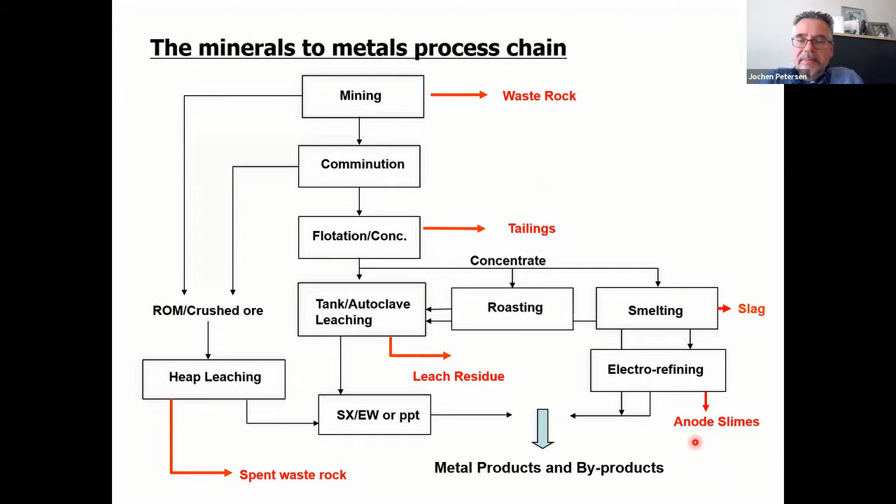And smelting, as I said earlier, separates between a metal and a non-valuable phase, and that phase is referred to as slag, which is then disposed of as a metallurgical waste. And finally, in electrorefining, in the context of copper, you also have a waste referred to as anode slimes, and they are of particular interest because they are one waste stream that has historically already been recovered, because it contains a lot of valuable metals as a byproduct of the value chain.

So, as I now illustrated in this previous slide, the mineral beneficiation chain generates solid waste streams at every step. But historically, the focus has only been on recovering the major value metal phases in the process, often just a single metal or sometimes two value metals, and all the minor components that are associated with that mineral phase end

up in waste streams. And furthermore, and this is also important to stress, even the target metal is never extracted 100%. Quite far from it, because you have so many steps on the way from the mine to the final metal product. Each of the process steps incurs losses, and those losses then reflect in the waste that you are producing in that particular process step. So that target metal is effectively not recovered, but ends up in the waste material through process inefficiencies.

In more recent times, and I should say this is already stretching back some 20, 30 years now, technological development has been and continues to be made to recover minor metals, especially the so-called tech metals that are attractive in high-tech applications, directly during the processing while they're still easily accessible in process solutions, in hydrometallurgy in particular. And so you have a whole host of process retrofits that the major refiners have introduced precisely for the purpose of recovering the metals while they're still easily accessible in the process stream.

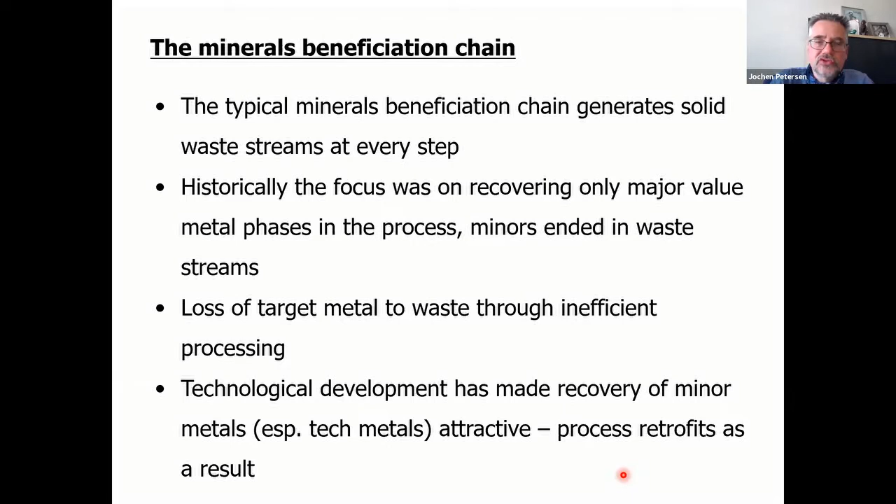I mentioned that all the key minerals have certain metal associations. So there is no such thing as a pure mineral of one type or another. And because Aysha didn't know how to pronounce it, the word chalcopyrite is the classic copper mineral, but it does not occur in pure form. It is associated with a whole host of other metals that need to be taken into account when you consider the recovery processes.

So for example, this is often quite well represented through the so-called wheel of metals, an example of which I'll show you here on the slide, where you start off with the key metal or the carrier metal that is of interest in a particular phase, for example copper, and then a whole host of other elements that are associated with copper minerals processing, but only some of which are easily recovered, and that's the gray inner circle, and many of which just disappear because they are too insignificant into waste streams or process byproducts, and some of which are just not economic to recover at all.

And so these wheel of metal analyses have actually been done for many materials in order to identify the opportunities for recovery of metals, either during processing or by reprocessing the wastes.

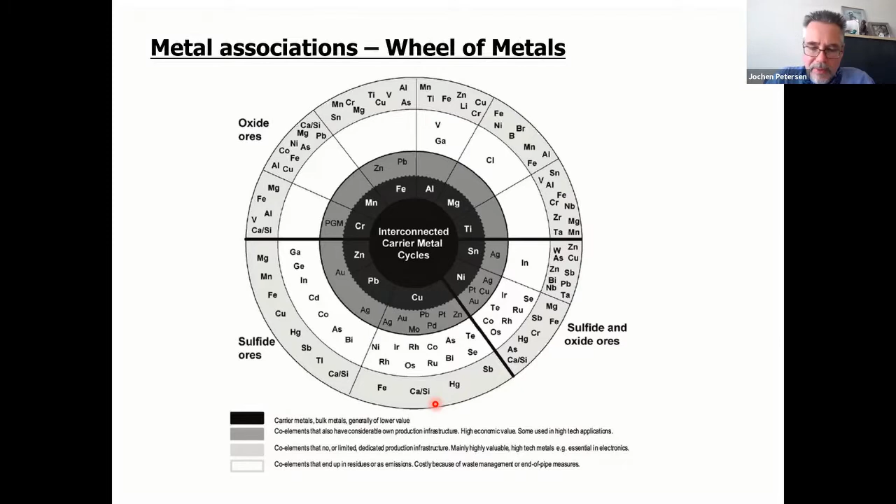Now, talking about wastes, I said earlier that historically these are just disposed of. So value metals are lost due to waste, due to uneconomic grade, to inefficient processing, to the lack of a commercial incentive for recovery at the time, and I'll come back with some examples in a short while, and the lack of a suitable technology to extract the value metal. And so these wastes are never just purely valueless. They may contain value fractions that have just not been recovered at the stage when they are disposed of.

And so forms of disposal I show here in the slide, depending on the nature of the material. I show here a waste rock deposit. So that's relatively coarse boulders that are piled on a big pile on the surface. You have various stockpiles that are built up in the operation. You may sometimes also just use the rock material as actual landfill. So for example, filling in whole valleys and then covering the top of the material.

And then the classic one, the most important and most fraught one in many ways, are tailings dams. So this is just a nice aerial picture of the disposal, where you basically take the fine material that comes out of concentration processes and leach residues as a slurry, you let the slurry settle out, and the water is then decanted either by sucking it away or just seeping through the deposit as a whole, and you just build up layers and layers of this deposited material.

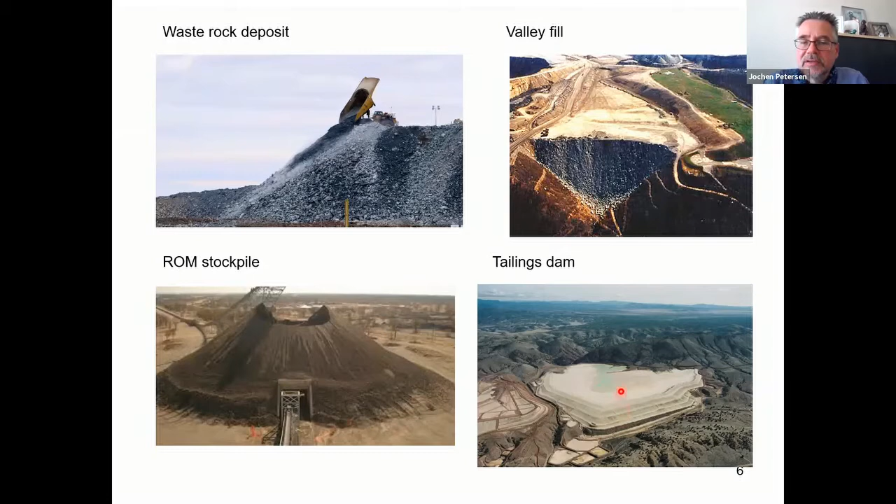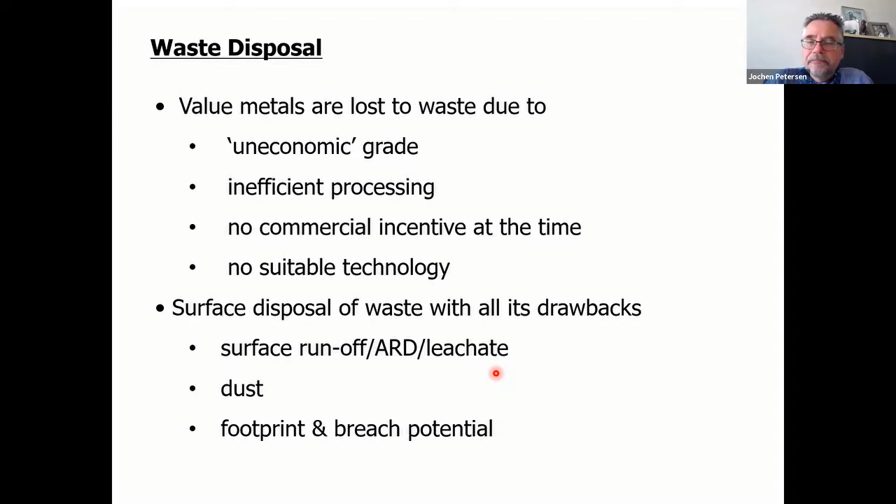But what is important about surface disposal is that very little of that material is backfilled, and most of the material is disposed in surface deposits with all their drawbacks. And I'm not going to go into much detail because they're all well known. We had various presentations in this forum on the characterization and issues associated with the surface disposal of waste, such as surface runoff, acid rock drainage, leachate generation, dust, the physical footprint and the potential for breach. So I'll just show here a few pictures to illustrate these effects.

Catastrophic dam failure, where you basically have a breach of the dam and a lot of slurry just runs out into the countryside, often burying under it human settlements or agricultural land. And so we hear these stories on a regular basis. That's one of the main issues associated with waste disposal, but that is only the most obvious one.

Mine dust. This is a historic picture, but nonetheless it still occurs, particularly around tailings dams in Johannesburg: these classic dust clouds that arise and affect human settlements around where the dust comes from through respiratory and health issues. And again, we have already heard about this from our colleagues who work in the mine dust network.

Then leachate generation. This is the process when incipient water, rainwater, seeps through the deposit and chemically interacts with the mineral contained therein, eventually reaching the groundwater, or surface runoff that will channel itself and find its way into waterways, so that you get the classic yellow boy discoloration of natural riverways from your classic blue to this yellow-brown color.

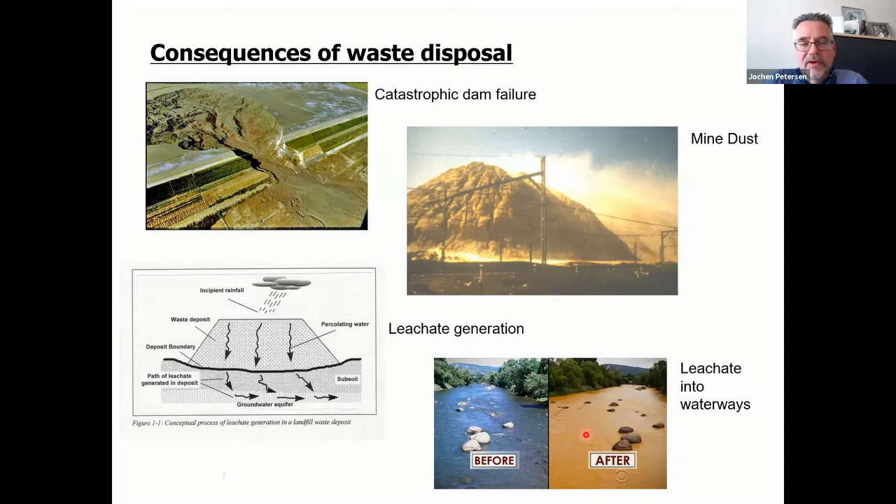And that is very much a real problem here in South Africa. There is a lot of research underway, not just to understand it, but also how one can mitigate these effects. But the focus in this conversation is really just about reprocessing from waste. And I said earlier already that some of this is already being done for different incentives, and I give a number of examples here.

For example, the recovery from historic tailings, because you now have better technology to more efficiently extract the material. For example, the Ergo process in Johannesburg on the East Rand, where basically all the tailings deposits are reclaimed, and both gold and uranium are extracted by better liberation techniques and better leaching conditions than you had in the original process 100 years ago.

There's also recovery from historic mine tailings due to a shift in economic value. A classic example here is cobalt, because now everyone is talking cobalt, everyone is after cobalt, but until 10 years ago cobalt was not a particularly important metal. There was enough supply as byproduct from conventional processing that people did not scramble for it. But with the whole battery storage and energy storage debate, cobalt has now become a hot commodity.

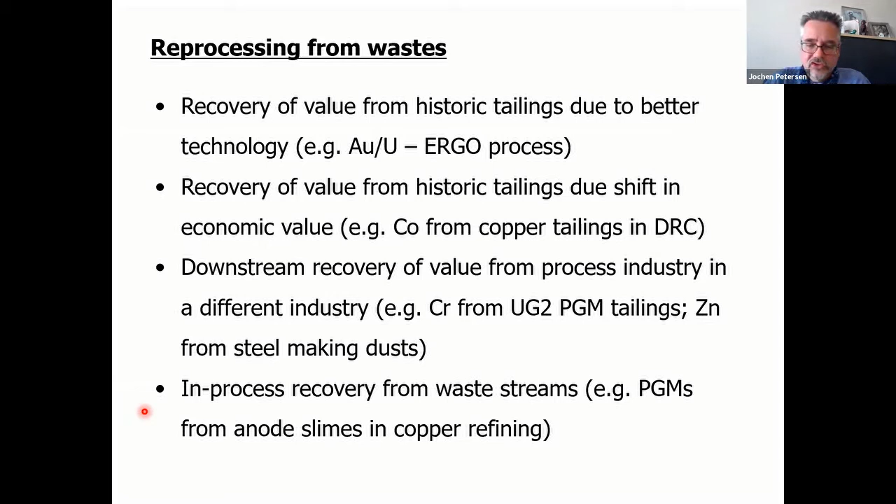There are many other opportunities; some are under consideration, some are being actively pursued, and this list is by no means exhaustive. As a first example here, the recovery of gallium from aluminium process waste, the so-called red mud. Gallium is an important modern technology metal. It is in very significant concentrations in aluminium ore, but it does not get recovered by the conventional aluminium process, the Bayer process, and can be extracted from the red mud phases.

Rare earths from phosphogypsum, as well as titanium sand residues. So those are two very different waste streams from two very different industries. For both of them, rare earth, there are hardly any deposits that have concentrations of rare earth on their own to just process them directly. And so in most cases, the majority of rare earth are associated with other minerals.

So phosphogypsum is generated from the sulfuric acid leaching of apatite. The apatite is a classic collector for rare earth metals that then do not report to the solution, but stay in the solid phase and are then precipitated by the gypsum that forms as a product of the phosphogypsum process. And they're very difficult to recover from that. Titanium sand residues: the beach sands that you process are enriched in order to extract ilmenite and zirconium phases, but the residue contains a significant portion of rare earths.

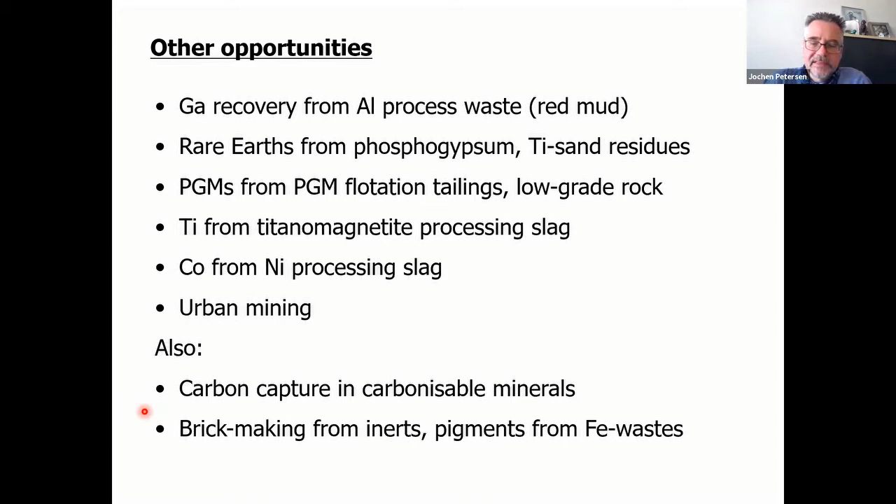So one needs to look at what incentivizes the reprocessing, and that is ultimately a look at the economics. Ultimately, it always boils down to the money. There are a couple of aspects in waste processing that are favorable, such as that the feed material is already mined, so you don't have to incur costs, or only very marginal cost, for extracting the rock or the minerals from the ground. It's easy to reclaim them from surface deposits. The feed material is often very finely ground. By processing them, you would remove an environmental hazard associated with leaving it in the surface deposit. And this way, by reprocessing it, you actually avoid disposal costs.

What is less favorable in the context of reprocessing is that the metal grades are generally quite low, and the more recently that waste has been generated, the better the original process technology will have been, and the lower the target metal grades will be. The target metals might also be contained in refractory minerals. Refractory means they are not easily dissolved or treated. You need high temperature processes or very aggressive chemicals to solubilize these minerals in order to extract the value that you want.

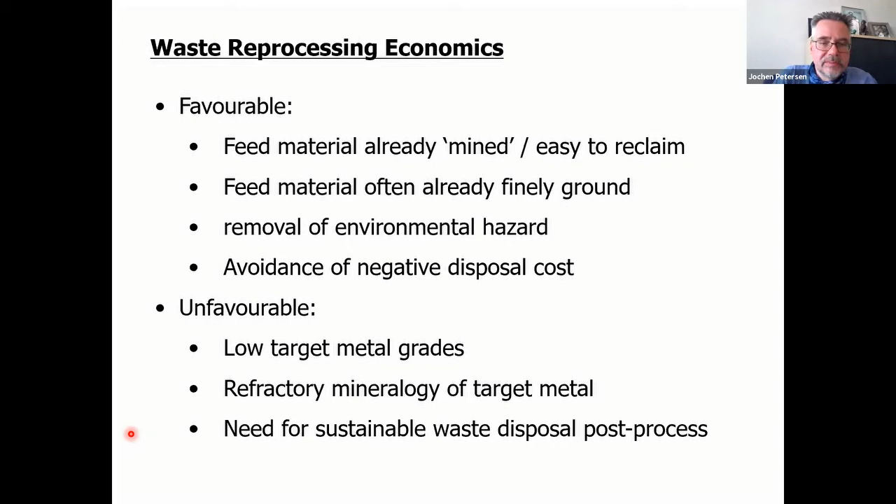So there are three economic drivers for the reprocessing of waste. The first, and I already alluded to that, is changing market demands. Cobalt for battery materials is the classic example, because it was almost considered valueless previously, and in the last 20 years or so demand has suddenly skyrocketed, because there are very few primary deposits of cobalt, actually none. Cobalt is always mined together with copper. So where it was previously separated away from the copper phase, it is now co-treated and co-extracted. But historically, there are significant amounts of tailings still available that contain extractable or economically attractive portions of cobalt.

The second driver is the political climate, or the concept of strategic resources. Here the classic example is the rare earth elements, which at the moment are mined, the figures vary, between 90 and 95% in China and refined there.

And there have been threats from China to basically exercise their monopoly and restrict the sale into the market of rare earth products. They are strategic for high-tech products and electronics, and particularly also for the manufacture of rare earth magnets that you use in windmills and for green energy generation.

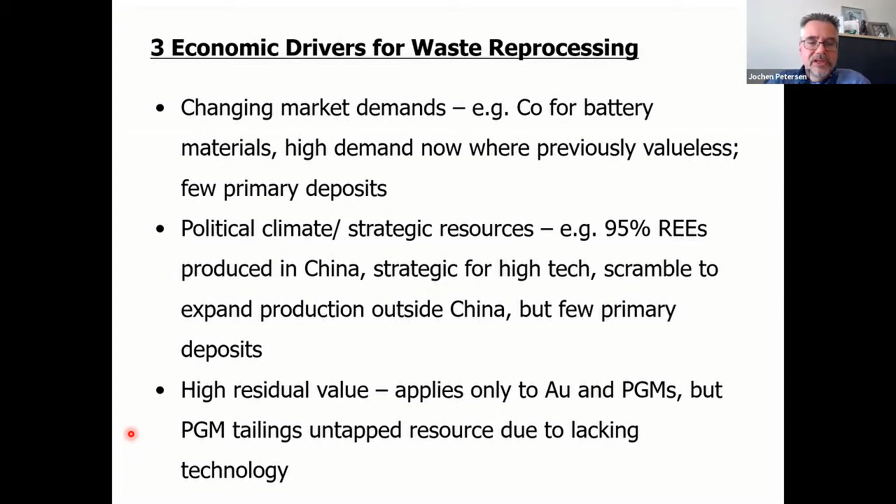So then let's move towards technologies that would be useful in the context of extracting waste. As I already indicated, economics are key drivers. So technologies ideally should be low cost in order to enable the processing of waste that one would otherwise just leave alone. To achieve that, one needs to look at a couple of characteristics that I've listed here. These processes need to be small scale and scalable.

So they need to operate, depending on the deposit size, from the ton a day scale to maybe the 100 ton a day scale. But a lot of the industrial extractive processes start at the hundreds of tons, or, depending on the raw material, at the thousands of tons a day or the tens of thousands of tons a day scale.

So one needs to be able to handle smaller streams, and yet the technology still needs to be cost efficient enough. It needs to be energy efficient. So energy intensive processing, particularly fine grinding or comminution processes and high temperature smelting, need to be avoided in order to make these reprocessing processes viable.

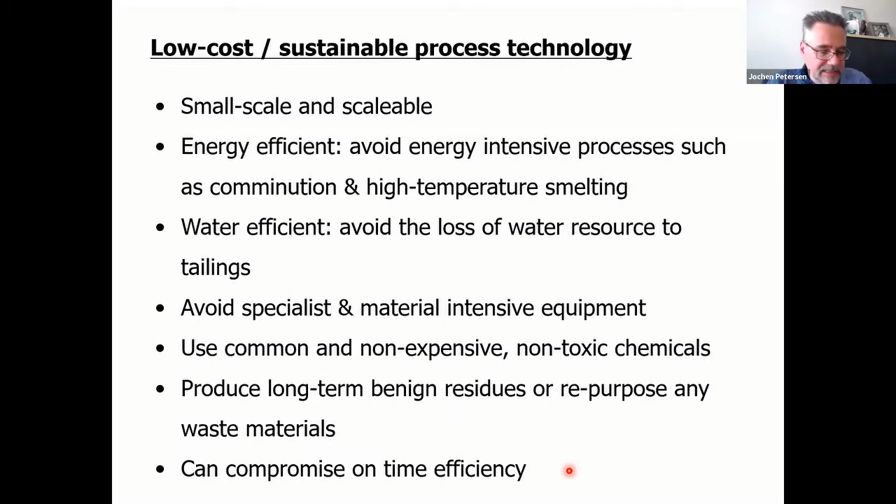So one such technology is heap leaching. And it is, as Aysha indicated, my area of expertise. It is a low-cost extractive technology, because, as I showed you in the first slide, it really just consists of piling the rocks on a big pile. You sprinkle solution on it. You put it on an impermeable layer at the bottom, and you extract the metal from the solution that runs through.

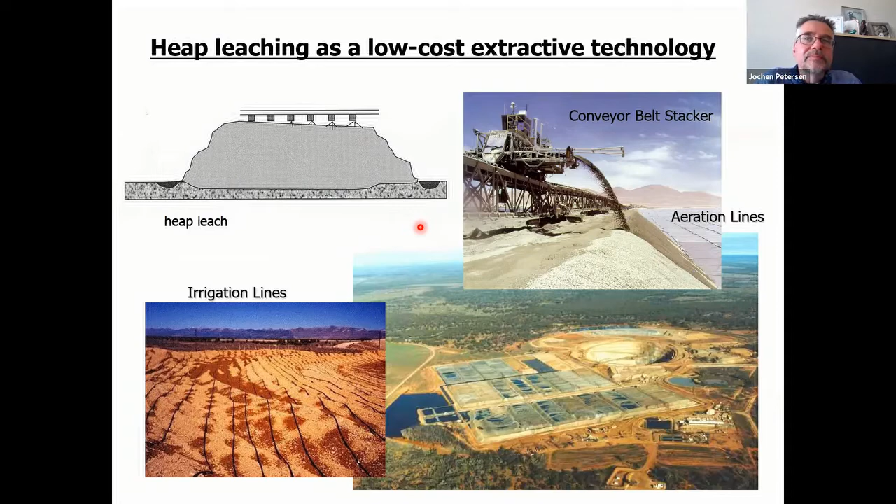And then when the heap is exhausted, you can either leave it in place because you've got a perfect drainage collection system already in place, or you remine it, reclaim it, and put it onto a better disposal site. Both options exist in practice. I'm not going to go much through the technology, the principles of heap leaching.

As I just said, you have solution trickling through. You have air that's blown up in order to facilitate the oxidation of sulfide minerals. And you can, under certain circumstances, generate heat in the process. But the key thing is what trickles through at the bottom is captured and collected in a carefully designed drainage system in order to process the material.

A similar drainage system or underliner system would be used in modern waste deposit design. So in a funny way, you design heaps already for disposal, because that's what happens after they are exhausted.

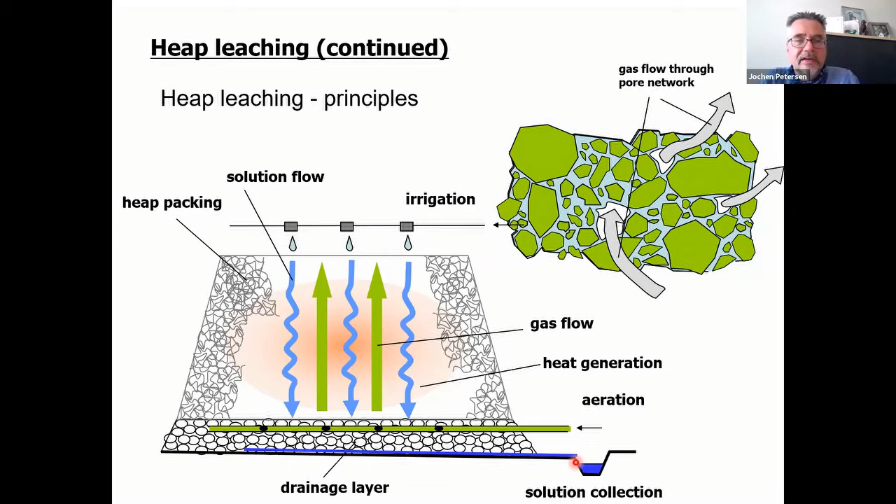The second technology I want to touch on as a potential low-cost extractive technology is bioleaching. Bioleaching makes use of a whole host of different microorganisms that can facilitate the dissolution of minerals. The example shows one of them, the ferric leaching of sulfide minerals that releases, in this example, copper into solution, and the reduced ferrous is then regenerated by microorganisms using oxygen absorbed from

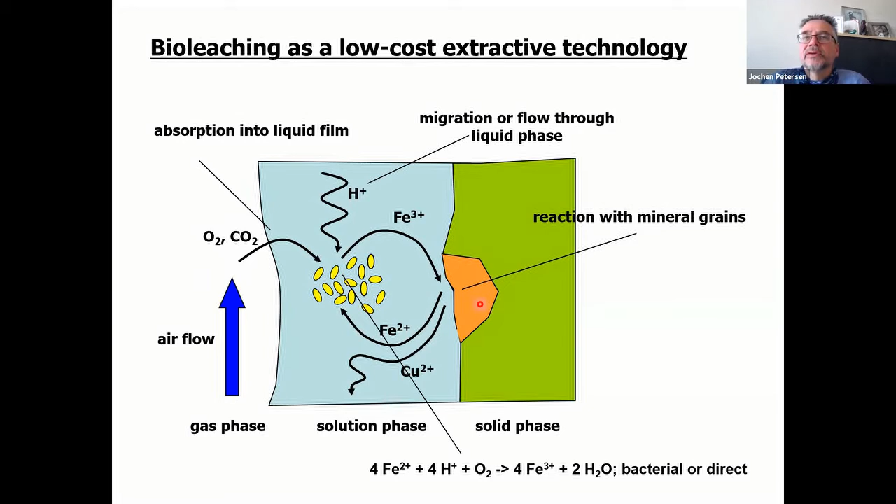the gas phase. But there are many other microorganisms that can facilitate the dissolution of other types of minerals, and there is a substantial amount of research going on trying to understand them. They are conducted in tank leaching processes, but under atmospheric conditions, which is one of the attractions, and at relatively low temperatures. And they can be scaled from laboratory scale to these 2,000 cubic meter tanks with gigantic wheels, and operated at any of these scales quite successfully.

So to summarize some key aspects of these two examples of low-cost technologies, and I acknowledge there are others, but time and focus don't permit me to go into more detail: tank bioleaching operates at low temperatures, is a robust and well-established technology, and uses organisms that are found naturally. They might be concentrated through careful selection, but they're not genetically engineered organisms. So you make, in a way, nature work for you.

Heap leaching, which interestingly can be combined with bioleaching, is also an established technology. It is mostly used for low-grade material in mines, specifically for waste rock. Its particular attractiveness is that its operation is fairly low maintenance, and the residues you generate can be left in place if appropriately managed beyond the active operation of a heap.

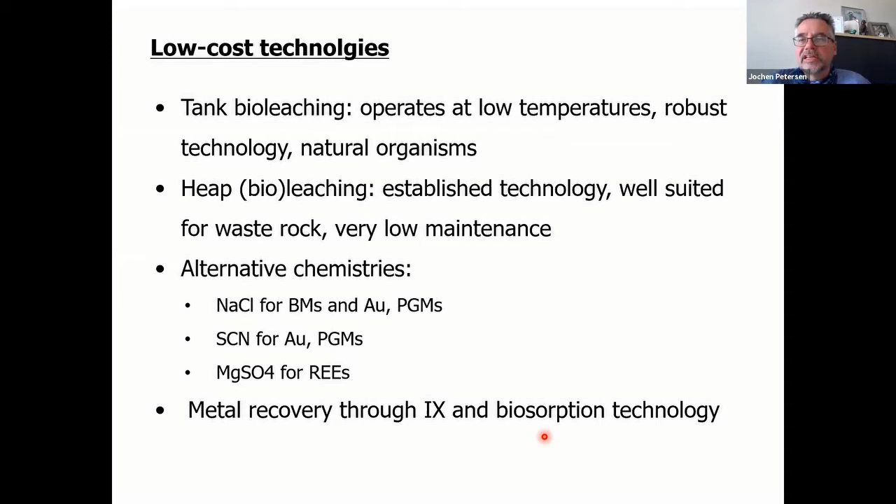So I mentioned there's solvent extraction as a classic technology, but solvent extraction uses highly specialist chemicals, and generally they're very flammable, and some of them are quite toxic. So alternative technologies are also of interest here. And two to mention are ion exchange and biosorption. So again, a biologically facilitated process that allows the capture of metals into a solid or separable phase from where you then can recover them.

So now the question, coming back to the topic of my talk, is how does artisanal and small-scale mining fit in with this? And here I want to just take a step back and say, well, historically, all mining was small scale or artisanal. If you look into Agricola's famous book, De Re Metallica, that clearly indicates all mining operations in the 16th century were small operations with a few people working there, digging in some small-scale mine. So large-scale mining is really something that came in through the Industrial Revolution in the mid-19th century. And so the artisanal mining that we find, particularly in Africa to this day, is in many cases actually just what's left over and had been done for a long period of time.

But of course, it has a very negative image due to issues such as child labor, slavery, gender issues, poor health and safety standards, rent seeking through mafias and dubious middlemen, exploitation, and so forth. But at the same time, one needs to acknowledge that a lot of these effects are actually created through economic and legal marginalization of such operations, or the outright prohibition. Small artisanal mining is effectively called illegal mining here in South Africa. And that is only a more recent development, because, referring to the book by Agricola and many stories, miners were a proud profession, even when they were operating on a very small scale under very hazardous conditions. It was a proper profession, which people chose as their life career.

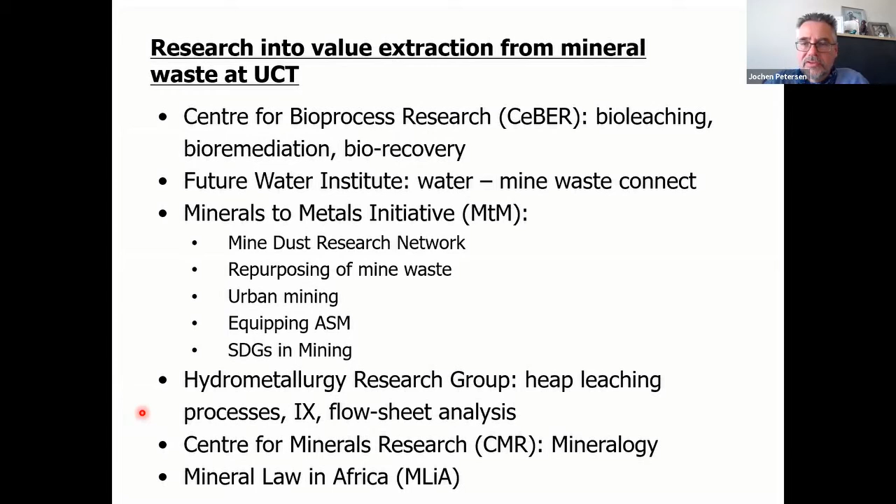And finally, the Mineral Law in Africa initiative that really looks at the value and the legal framework that revolves around mining, especially in the artisanal small-scale sector, but also in terms of incentivizing and operating the research around recovery. So with that, I thank you.

I didn't go too much over time, and I'm very happy to take some questions.

Thank you so much, Jochen. That was a brilliant presentation, and it really does function well between those who have very little technical knowledge and those that are a little bit more in tune with, you know, the chemical engineering side of things. So thank you so much for, yeah, spoon feeding some of it for me. I really do appreciate that, alongside the more technical aspects.

So we have one question. Firstly, just congratulations on the presentation and generally well received. The question is, are there any commercial operations utilizing bioleaching to reprocess mine tailings?

Yeah, thank you for the question. In fact, I showed a picture of the bioleaching tanks that are in operation, or I think they are now decommissioned, but for a long time, these large tanks are from the Kasese bioleaching plant. They are reprocessing cobaltiferous pyritic tailings that were left behind after the extraction of the relevant copper value that then was fed into a smelter.

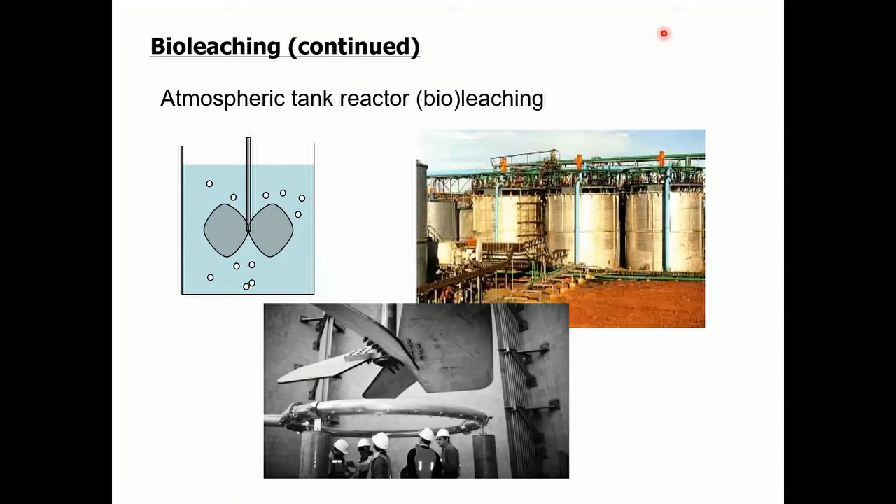Sorry, Aysha, I need to turn up my volume. I can't quite hear the question. Just give me a second. You can also see the question. It's not in the Q&A section, it's in the chat. That's not the issue. I have to just quickly stop sharing because I can't get to my volume button. That's all. So please just repeat the question.

Okay. You do not map out the toxicity changes along the process, or you do not map it extensively. Do you feel that it is highly unethical to place such vulnerable people in the direct path or face these hardships of the toxicity? This explanation sounds similar to when we placed people in front of asbestos, because they too could benefit. Toxicity mapping is what I would recommend.

With this done, then the ILO regulations will already be exceeded. Then to mitigate this risk, are you not then ramping up the costs of the operation and eventually leaving you exactly where you are, with a waste stream that is in any event a sub-economic target?

It's a fair question to ask, and I agree that in the context of evaluating any particular option, one does need to look at the toxicity, both in terms of the products that you're handling or the process that you're operating and the waste products, if there are secondary wastes that you're leaving behind.